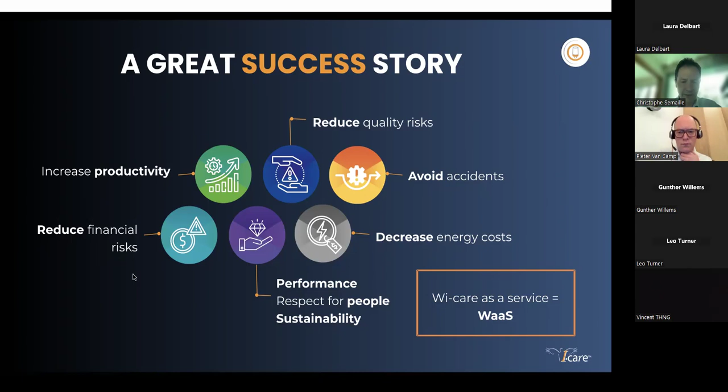Yeah, there are solutions today that require a lot of CapEx. We are bringing to you today a WaaS solution, Wi-care as a Service, which is an OpEx model where basically you can, in a very short time, get an asset maintenance plan up and running based on predictive maintenance and data. I will go further.

Yeah, what is the value that we can bring to you? This is an example of a petrochemical client where we measured the overall equipment effectiveness. So as you know, this measurement is a reflection of availability, performance, quality. The more your machines are available, the more they perform, the more they are within the quality requirements, the higher your OEE. Now what you can see here, between 2015 and 2018, OEE was quite diverse.

It could be very low, very high. So the little blue dots are the monthly OEEs. The green is the yearly OEE average value, and the red are the min and max values of OEE. You can see that in 2015, 2018, the values were quite widely dispersed. The average value was quite low.

And then this client went to predictive maintenance and started implementing in 2019 and 2020. And so what we can see here is that the average value has basically increased quite significantly, but not only the average value, the range, the dispersion of asset performance has narrowed down. So with predictive maintenance, you can really increase the efficiency of your machines inside your factory or factories.

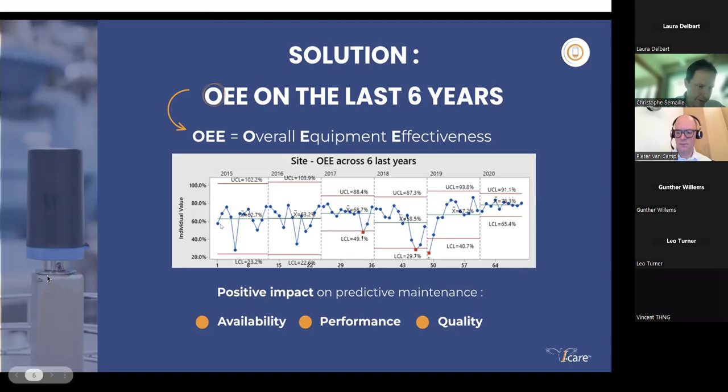So yes, what can we help you achieve today? We think that we can target, depending on where you start, a 98% reduction in downtime. So we make sure we work with you to avoid machine downtime. And if you achieve this, which we will do our best to do, you will get a 10 to 20% increase in productivity of your plant. These are the orders of magnitude that we achieved with our clients over the last 20 years.

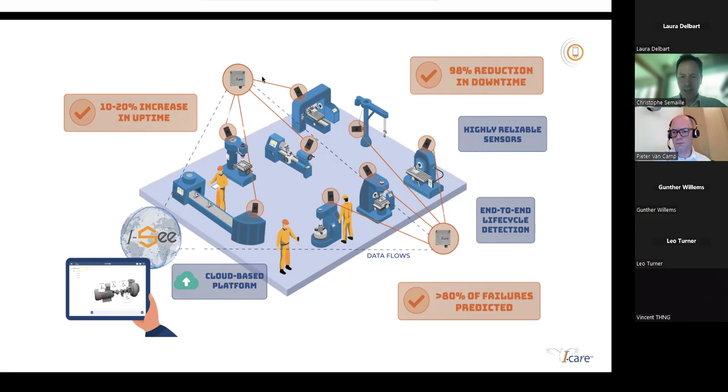Next slide. Yeah, I talked enough. I think, Peter, let's move on to this part. Please go ahead. Yes, thanks Christophe.

So as you said, Wi-care as a Service is the one thing that we see as the lever for you, for the end users, to go into predictive maintenance, or more to say into digitalized predictive maintenance. But maybe the first question we need to ask is, why do we believe it's a good time to start with that approach, with your digitalized predictive maintenance approach? Why should you invest in that today?

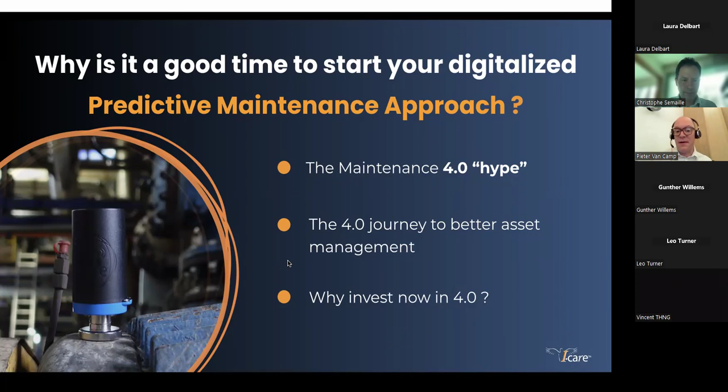Well, some would say that we are in some sort of a new industrial era, and we actually are. That's for sure. Some would rather say it's a hype. In any case, at I-care, we believe that we need to use this digitalization approach to help you better manage your assets. So now, how do we help you with that?

Basically, our goal is, by making sure that we shift that hype from something that would be temporary, to create something that creates a long-lasting impact. And as such, it will allow you to increase your uptime, create higher customer satisfaction, work on your cost reduction on maintenance, which are typically goals to go for digitized predictive maintenance.

But there are still people that are refraining from this approach, who are a bit afraid to jump on it, for the simple reason they think they don't have enough data, or they don't have the capability to interpret that data. And that's exactly where we will jump in, that's exactly where we will provide a solution that is called Wi-care as a Service.

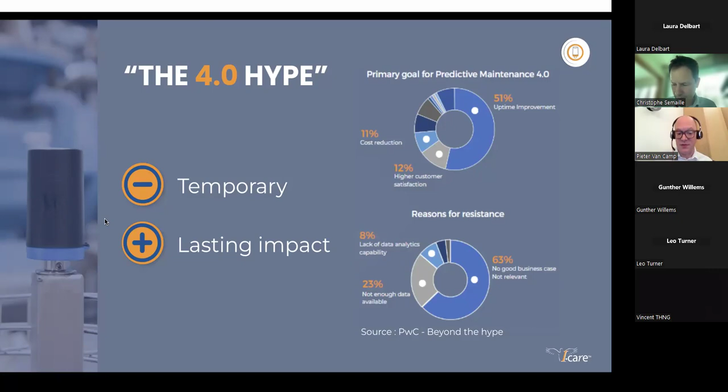Great, thank you Peter. So yeah, I think it's good to maybe show you again a video. As we say, our words are good, but yeah, images are even better to show you what we are bringing to the market today. So here's a little video on our new wireless sensor and predictive maintenance solution.

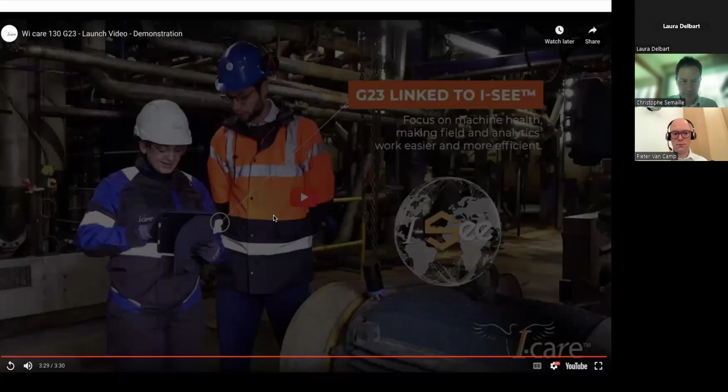Okay, let me do the next step. I hope this gave you a little

Visualization of what we basically do on the field. We deploy sensors that allow us to see a lot of elements inside the machine. This goes to our software platform, which allows detection of failures, so your team is informed before they arrive and can quickly work on your assets.

But Peter, please go ahead, you had something else to add. Why would you consider Wi-care as a service?

In essence, Wi-care as a service is an all-inclusive solution that allows you to deploy predictive maintenance in one go, without any hassle or restrictions on our end. It's a solution we have been developing for quite some years now, on one hand in research and development, and on the other in the business model. What we see today, and why we are here, is the launch of our Wi-care 130 Generation 23, the sensor you have seen in the video. It's actually the best example of that development.

So our aim with Wi-care as a service is that we can free you up completely from the implementation of a digital PDM solution by taking it all in our hand. That model doesn't require any upfront capital investment, but still provides all the output you want: information on asset health and predictive maintenance, plus insights on how to improve that asset health, the prescriptive part Christophe was speaking about. So those two things you get out of Wi-care as a service without needing to worry about all the bits and pieces that come around to get it up and running.

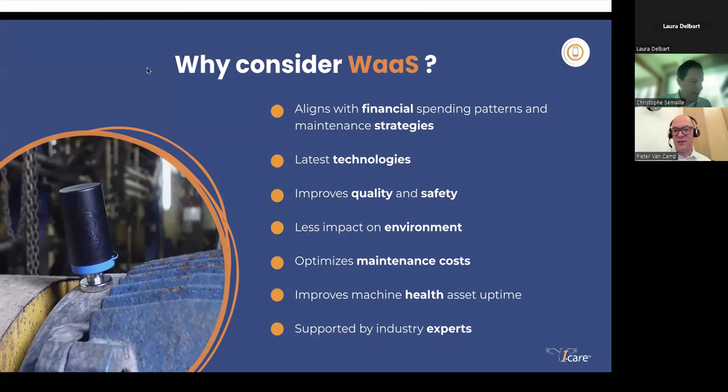Christophe will jump in with us now a little more into the details of why a new sensor. Thank you, Peter. So one of the main objectives for the new sensors we are deploying - this was actually the previous generation of our sensor. We're talking now about the 4th generation, which is this one, shown here on the slide. This is a new vibration wireless sensor, the 4th generation of this wireless sensor.

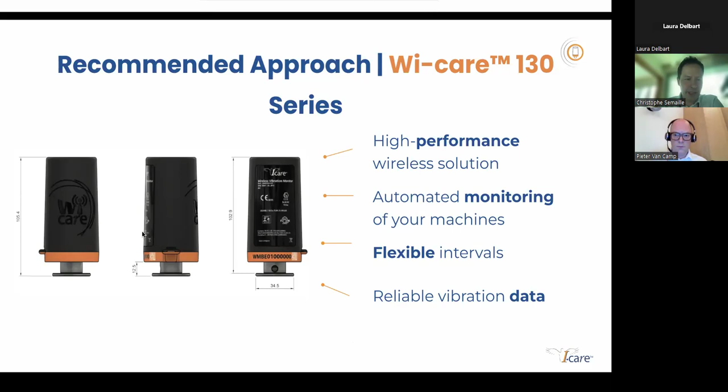For those of you who don't know our previous generations, we're actually a wireless sensor, so it's plug and play. You don't need any complex wiring, you just put it on your asset. The lifetime I mentioned, we're up at least 5 years today of battery lifetime, which is great.

We also worked a lot on the broadcasting and networking aspects of our sensors. These sensors need to communicate together to bring back the data to our platform. Today we've optimized the networking topology between sensor and gateway to reduce consumption and extend the broadcast range. We're mostly focused on rotating assets with these sensors.

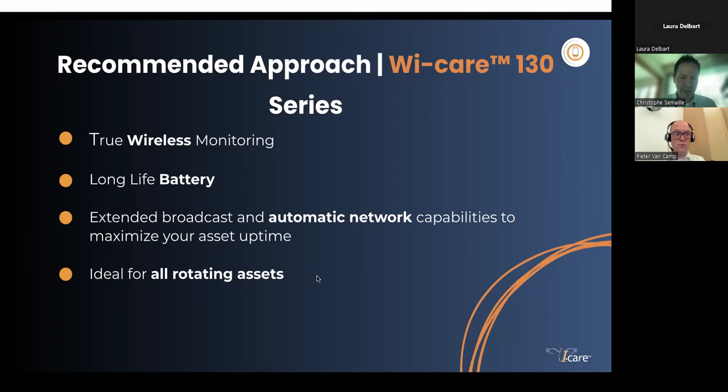Let me add some key unique selling points. Today we have the non-ATEX version, but we also have the ATEX, meaning you can deploy these in explosive environments. A lot of our clients in petrochemistry and on offshore ships are active in explosive environments. Our sensors are ATEX proof - these are the ones with the orange labels. We also have the blue ones, which are non-ATEX.

Something else is the frequency range of our sensors. We can today monitor from a very low frequency, 1 hertz, all the way up to 20 kilohertz. Why is this important? Some vibration specialists are probably here, but the wider your frequency range, the more you can actually see. Like a doctor - the more you hear inside the body, the more you can identify what a potential failure could be, ahead of time.

Of course, having a wide frequency range is not great if you cannot measure this wide range. So we have today 16,000 lines that measure this frequency. We can cut this 1 to 20 kilohertz range into 16,000 lines to really see the slightest frequency, amplitude, and spectrum change. We send the whole spectrum to the gateway - we don't just send an absolute value. We use the spectrum to identify failure modes and actions you can take to solve your problems. We're also very rugged, so we can work in harsh environments and withstand today 50 G of shock, which is quite nice.